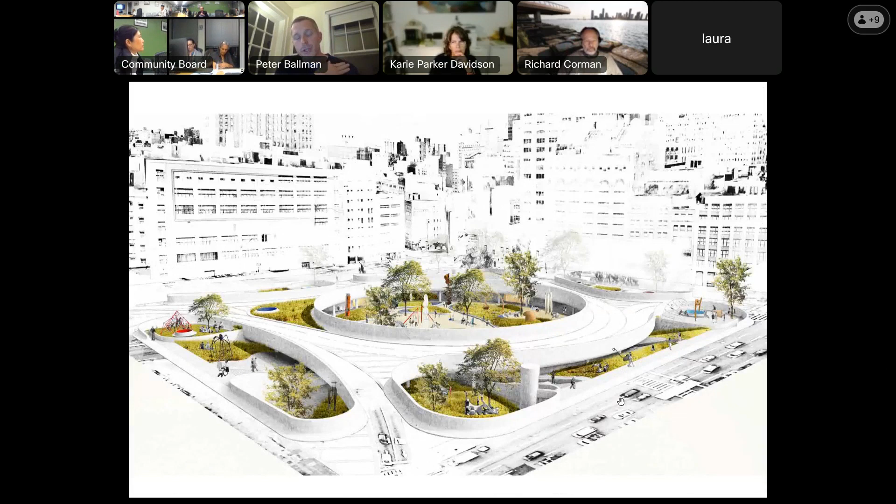Rotary Park is a 501c3 dedicated to transforming the Holland Tunnel Rotary. What we're looking at here is 5.5 acres of space dedicated to automobile infrastructure, placed smack dab in between a bunch of vibrant and exciting neighborhoods, all of which seriously lack open space. A few years ago, as Alice said, we proposed a grand architectural vision, which received a resolution from the Waterfront Parks and Culture Committee that essentially supported the effort to create public space out of the Rotary, not necessarily the design itself.

We were encouraged to explore resilience and understand the resilience features in more depth, which we have done, and that's what we're going to present tonight. Hopefully we can get some comments and hopefully your support.

Over the last year, I've been working with Jared of the Tribeca North Neighborhood Association. Jared reached out about a handful of trees that fell down around the Rotary during the pandemic, which he was hoping to replace. That launched a huge initiative in his neighborhood, leading to the Tribeca North Neighborhood Association. Jared's request for us to plant these trees allowed us to mobilize our network, including the Parks Department and the Port Authority, and we were able to plant those trees.

Ever since we got those trees planted, Jared and I have been hard at work trying to tackle the Rotary itself, and we boiled down all the different issues to a couple of salient points. Number one, the neighborhoods of Tribeca, Chinatown, Soho, and Hudson Square have the second worst air quality in New York City, particularly small particulate matter, due essentially to the heavy traffic in and around the tunnel and Canal Street. Number two, flooding.

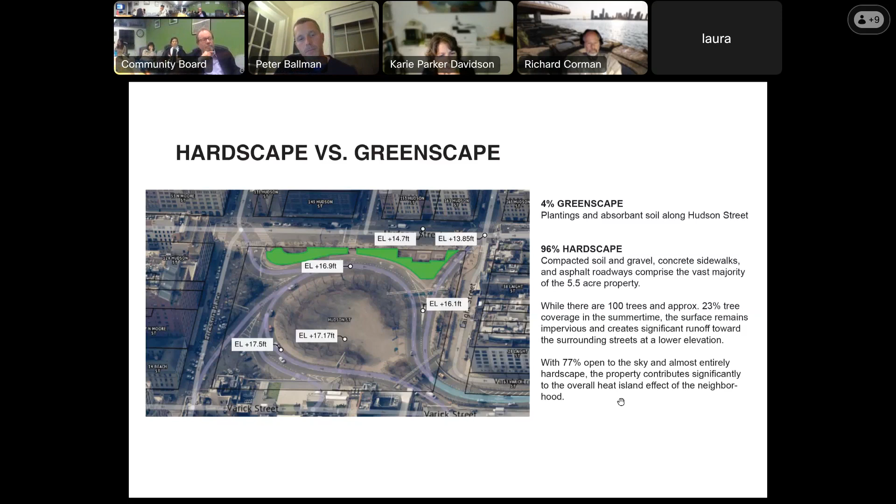So what do we propose to do about this? We propose to take this concept, which we see everywhere in the city, of the rain garden, which exists in small chunks throughout the city, and apply it to the 5.5 acres of continuous open space in the middle of the road. Essentially taking 5.5 acres of hardscape, which creates a tremendous amount of runoff in extreme events, and turning it into 5.5 acres of sponge—of absorptive material, groundscape, greenscape—that can absorb that water.

So this is the way that it might look in section. This is the sponge at the center of the rotary. This is the rotary roadway. This is just kind of a general section, but there's also potential for a sponge at the fence line, and then of course, where all of us walk around the perimeter.

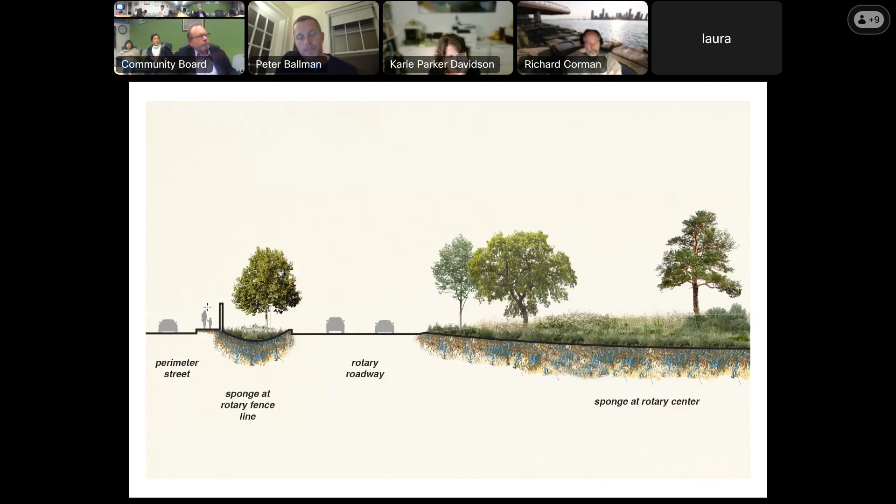So scope of work, just to be clear, is essentially this: to excavate—these numbers are general, but—from 1 to 3 feet of compacted gravel and soil across the central space of the rotary. To install 1 to 2 feet of compost, biochar, earth, mulch, and topsoil across the rotary central space. To plant 200 new trees of varying species while keeping the existing mature trees that are already there. Planting native shrubs, hardy native grasses, and herbaceous perennials across that space in between all the trees. And then to connect to the existing drainage infrastructure at the rotary perimeter.

We feel that by doing this, we can create a space that is in line with these Plan NYC initiatives. And Julie can speak to these because Thornton Tomasetti was part of constructing that plan: to achieve 30% tree canopy citywide, to implement a multi-layered strategy for flood resilience, to maximize climate infrastructure on city-owned property. This is state-owned, but hopefully we can work something out there.

Creating accessible, connected, open public spaces, and reducing sewer overflows by up to 4 billion gallons. So again, because all the water from the rotary runs into the sewer, turning the rotary into an absorptive surface can help solve these issues in our own little corner of the city.

Speaking specifically about water—this is the issue that you guys were just speaking about—this is the EDC's map of all the various resilience projects around the southern tip of the island. As you know, right here at this dotted line is where the Army Corps of Engineers starts and proceeds northward. This triangle is essentially served without that wall. This is the location of the rotary, which sits essentially on a peninsula and is a little bit higher than the surrounding area.

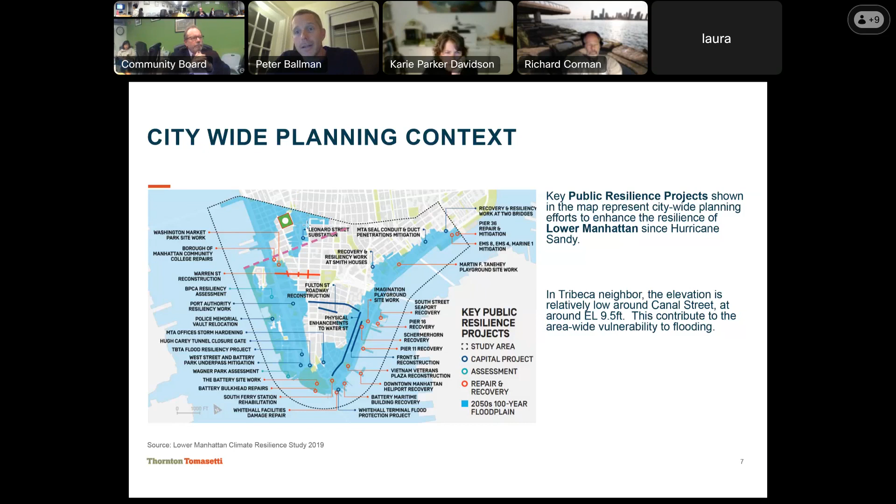So what we propose with the sponge is essentially to collect that water and allow it to feed the trees and the ecosystem that we are planning to install, and that will absorb that water. Any water that does not get absorbed will be filtered before it passes into the sewer system. The water that passes from the roadway can be collected in these perimeter bioswales, these perimeter sponges, as can that from the sidewalk.

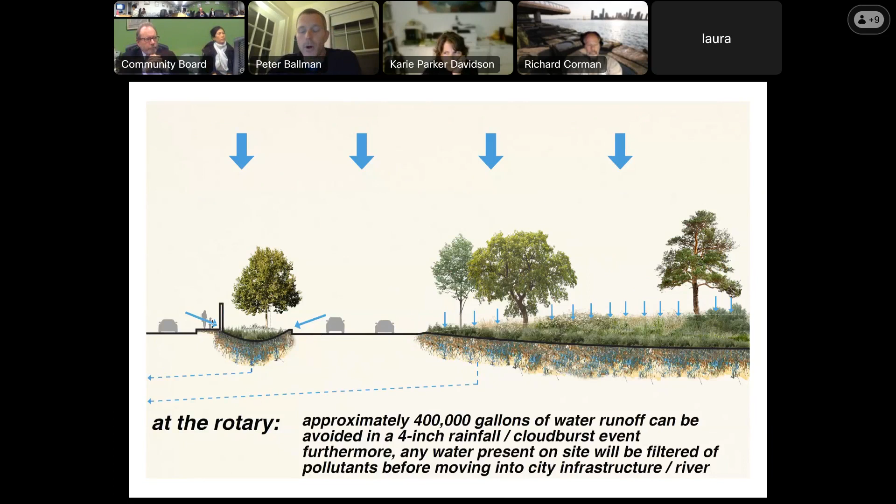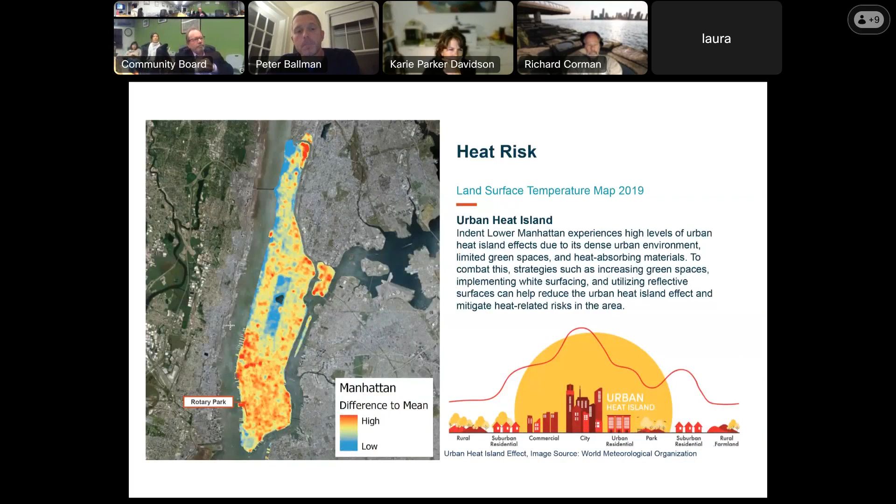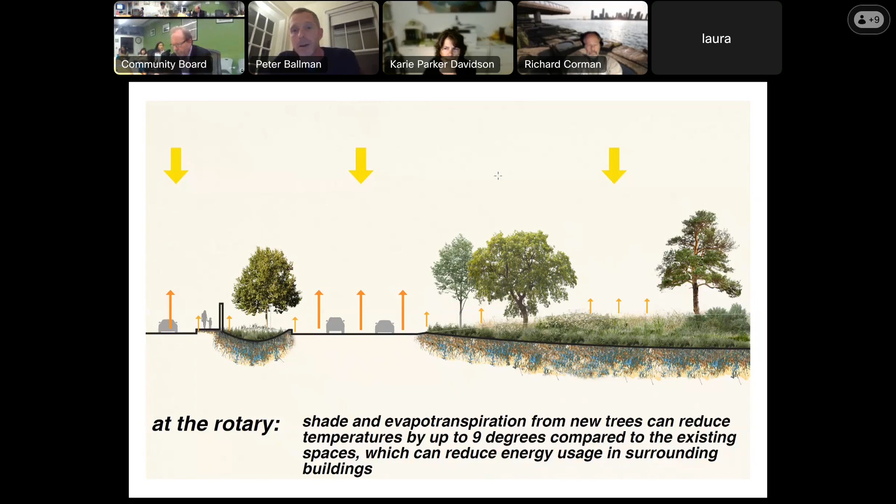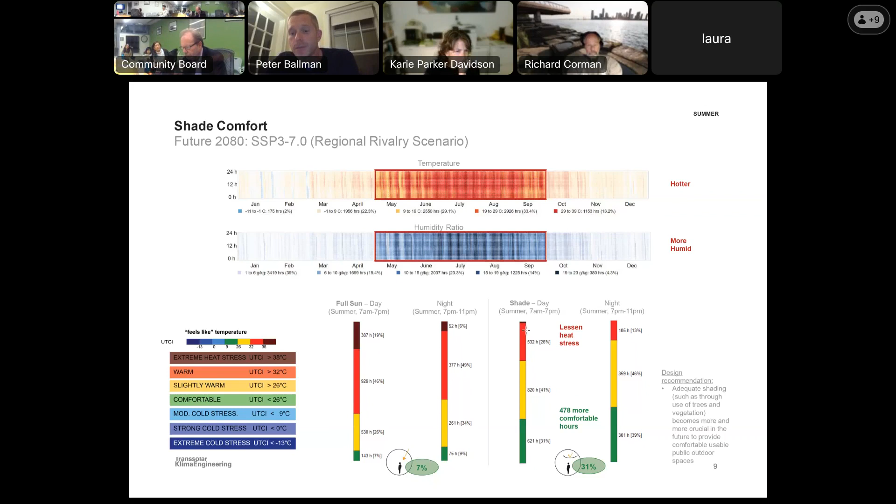In terms of comfort, by greening the center of the Rotary and creating that layer of comfort, we're refocusing attention around the perimeter, showing that the Rotary can be seen as a space with value and utility. We can incentivize investment around the perimeter to make the pedestrian experience more hospitable, essentially turning the Rotary into a refuge.

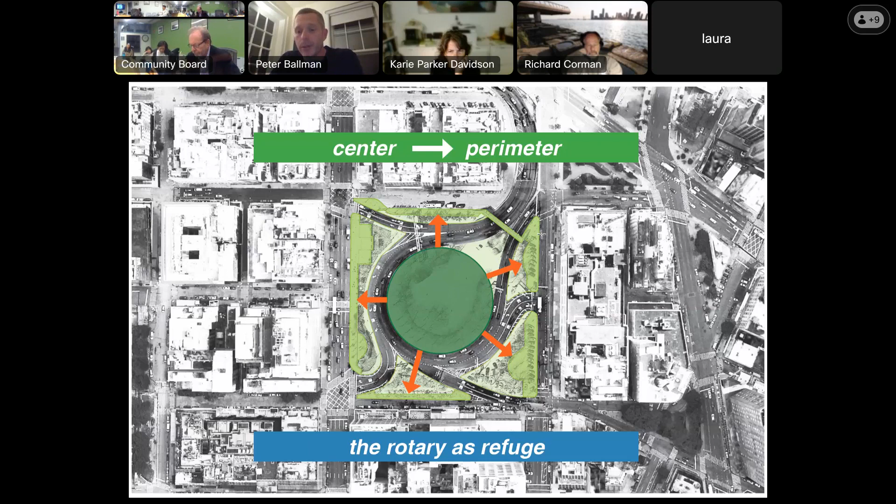There's a lot of work to be done. This is an existing condition on Laight Street, showing we're essentially very close to traffic. Laight is the easiest street to do anything with because it's not a heavy throughway.

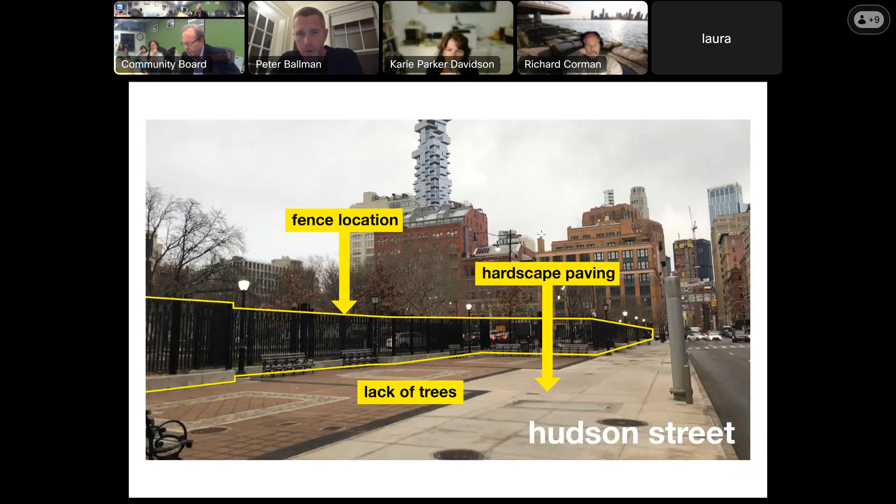Here is Hudson Street—very unfriendly, a lot of hardscape and space, but all hardscape and no trees. On Varick Street, we have parked cars taking away from the sidewalk. This is primarily NYPD, and there's a large pedestrian bridge that's not ADA accessible, making it impossible to move from the east side to the west side if you're not mobile.

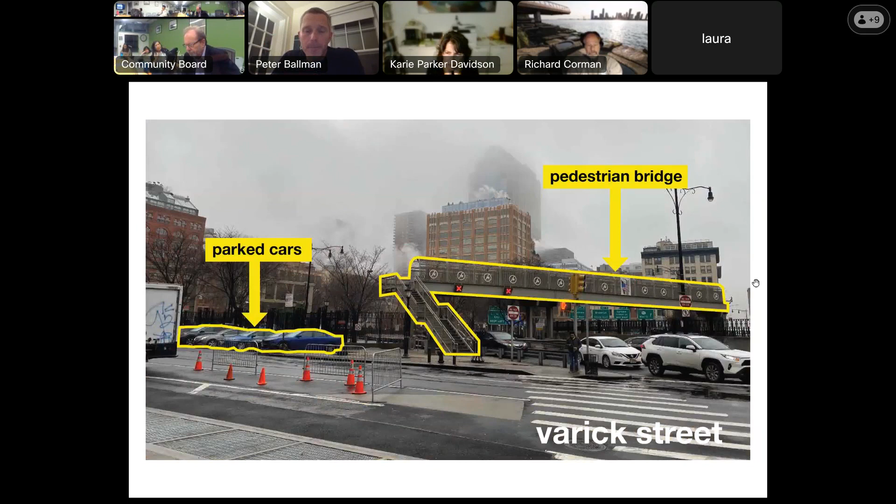So there's a lot of room for improvement. What we want to do, as diagrammed in this slide from Thornton Tomasetti, is start to reimagine the sidewalk as a multifunctional surface that is both permeable—able to collect and drain water—and more accessible to pedestrians and bike traffic.

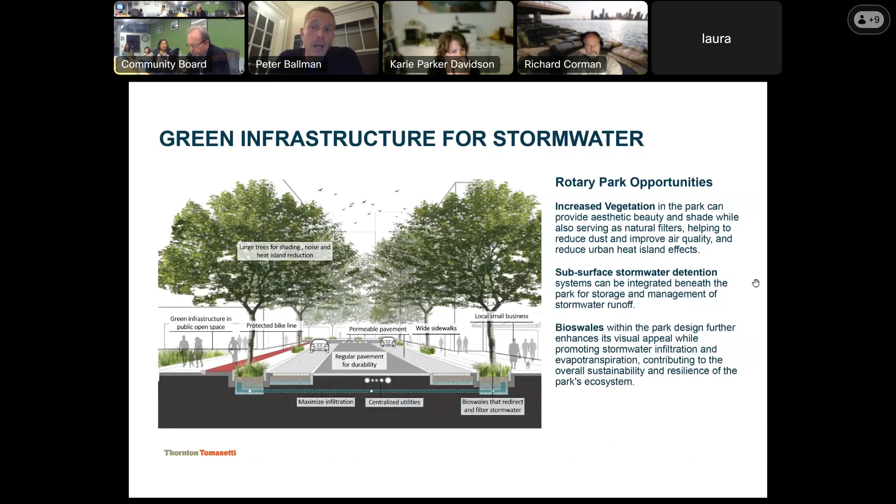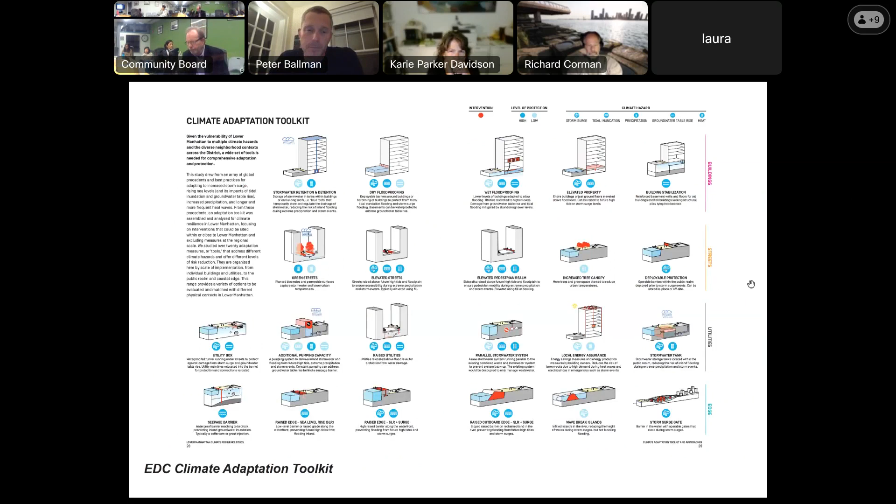What we want to do is fully in line with the DDC guidelines for high performance infrastructure, as well as the EDC's climate adaptation toolkit, particularly increasing tree canopy and greening the streets. Most importantly, it's in line with what's been happening across the city over the last two decades, where DOT, Parks Department, and local BIDs have worked together to transform these strange, unloved interstitial spaces at a low price point into a refuge worth stopping at.

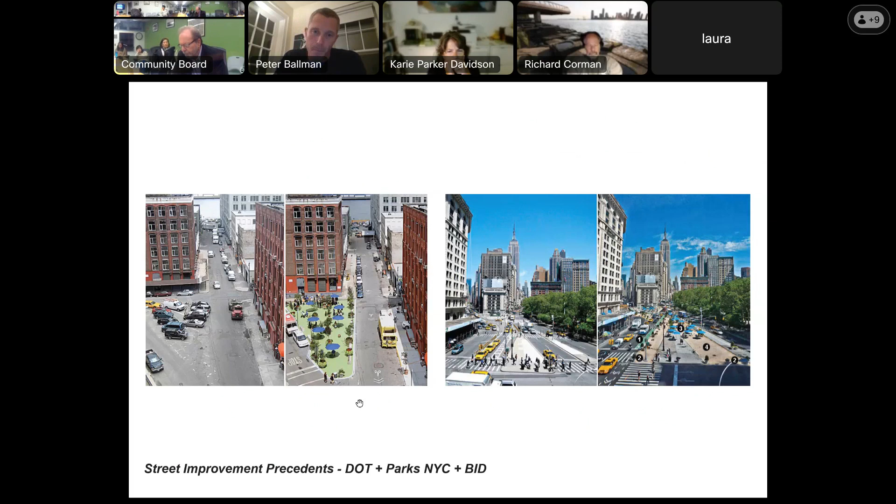So with our proposal, I'll try to outline how we want to achieve all of this: essentially understanding what's happening at the center and at the perimeter in parallel. Rotary Park would ideally help push both of these pieces of work forward together.

In the center, the fence line represents the property line separating the Port Authority's property from the city's. Inside the Port Authority's property is the sponge, which the Port Authority will own and be responsible for.

What happens on the streets is a more grassroots operation where Tribeca North works with us, and we're working with the DOT, with Parks Department, with the City Council to improve all of these spaces around the perimeter. And again, these have to happen in dialogue.

The way that we see the rotary, the sponge happening is beginning in the center. We're calling the center easy because there's a lot of work area, and once you have equipment in there, you can pretty much get it done. This would get us to 30% greenscape and 70% hardscape.

Number two is a sponge at the perimeter, which we're calling medium because there's a little bit more coordination. There's less space to work, but it is more accessible and potentially very transformative. By greening the perimeter of the rotary, meaning outside of the roadway but inside of the fence line, you're getting up to 60% greenscape and 40% hardscape.

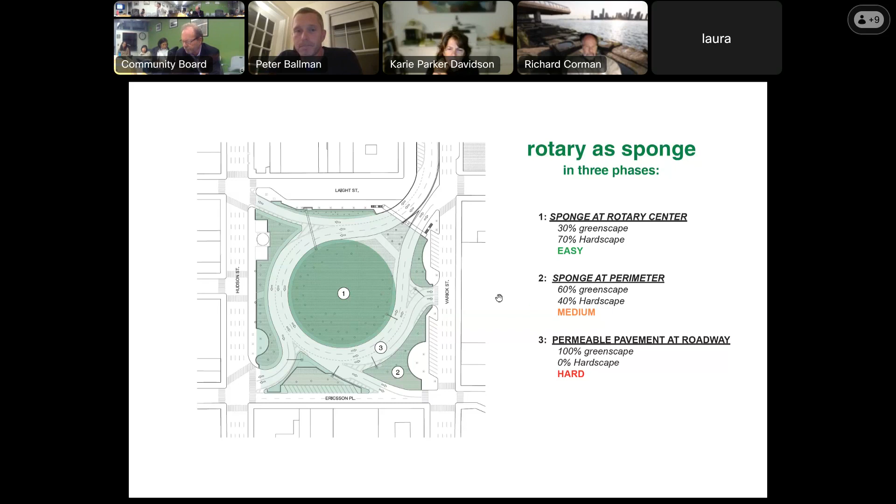In terms of public spaces, this is something I had a conversation about with Betty Kay, which inspired her thoughts on how we might approach improving the perimeter of the rotary. Essentially, you start where it's easy and work over to where it's hard. This area is hard because the New York Police Department has Precinct 1 right here, and they occupy a lot of the space with their parking.

What we'd like to do - the reason these two areas are moderately difficult is because they have a lot of through traffic and there's a lot of coordination necessary with DOT. But Laight Street is pretty simple. It's entirely residential, almost entirely residential. There's not a lot of through traffic. And there's the incentive that it's where all the people who move across the pedestrian bridge are received, moving from east to west.

So here we want to give ourselves a small budget and try to make some real improvements, like we did planting trees here, and really drastically improve this space and create a small victory that can give us a little bit of momentum to move on to Hudson Street and then over to Varick.

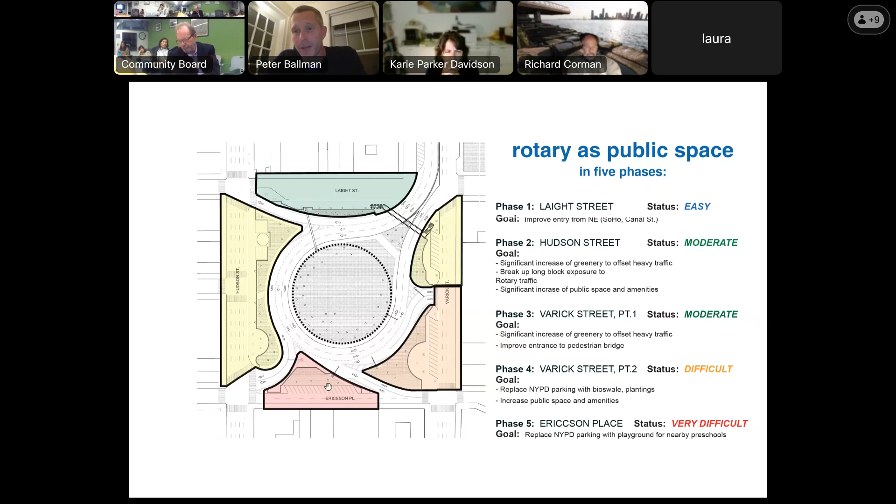Meanwhile, we'll try to find some new parking for Precinct 1, so that we can replace these parking areas with swales, and hopefully this one right here with a playground, because there's a lot of schools in the area that need places to play.

So our goal is to transform the Rotary entirely into an environmental asset, a public amenity, and a piece of green infrastructure. We'll do this by reducing runoff, collecting water, reducing the heat island, improving carbon sequestration, and improving the dismal air quality of the area to whatever extent possible with a 5.5 acre area.

And then a ton of improved pedestrian experiences - obviously creating more shade, creating bioswales at the perimeter, creating more places to sit, more places for people to play, for people to enjoy, which we believe will come once people see the potential of the Rotary to actually become a green space.

Similar to what's happened at Freeman Plaza, we're kind of changing the thinking of the Rotary so that the community will stop seeing it as a place entirely exclusively for cars, an eyesore that should be avoided at all costs, and start seeing it as a destination - a place where you can sit and relax and enjoy the city.

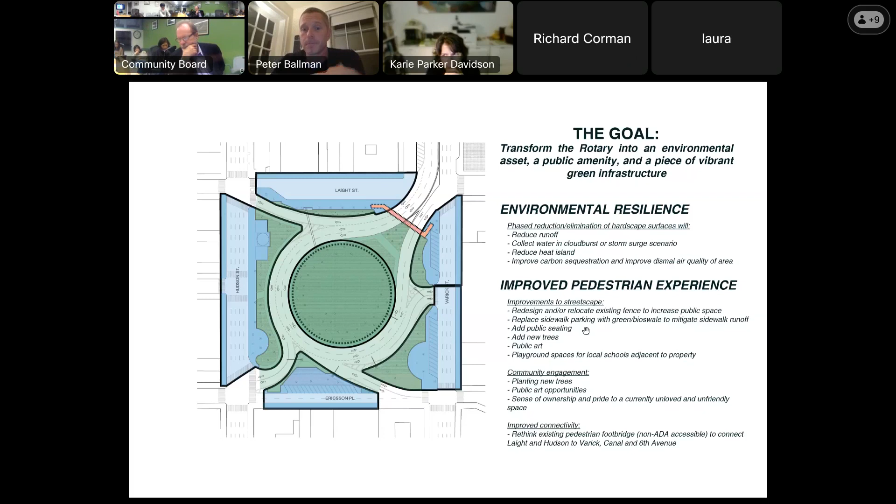That's it. Thank you very much.

Oh, wow. Not everybody gets applause after a presentation. That was really terrific and really interesting to see where it's come in the last, I guess, 4 years.